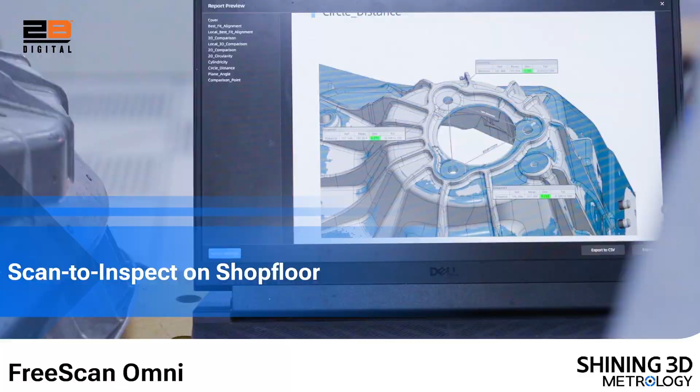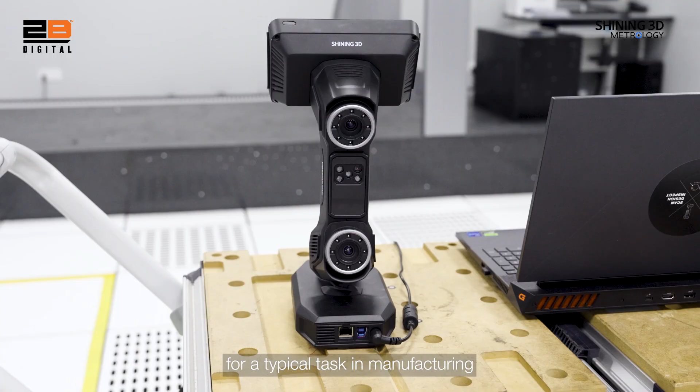In this video, I'll introduce you to our new standalone inspection-ready metrology 3D scanner, FreeScan OMNI. Today, we're taking it to the metrology lab for a typical task in manufacturing: first article inspection, or FAI for short.

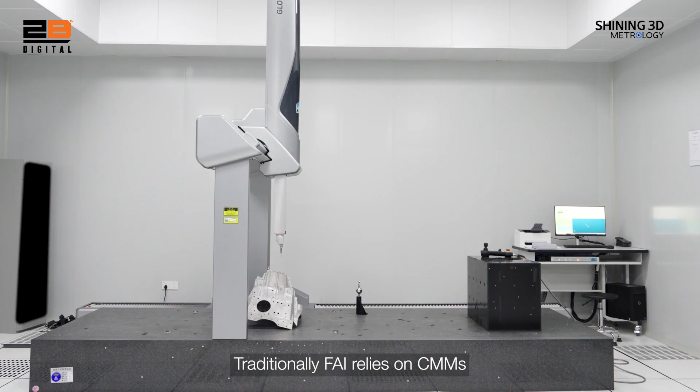It's a key quality control process used to verify that a newly manufactured part meets all required parameters before mass production begins. Traditionally, FAI relies on CMMs, which are accurate but slower and often require multiple setups and additional software to complete the process. This is where FreeScan OMNI comes in.

Its stream scanning mode combines wireless scanning at 0.02 mm accuracy with a PTB-certified inspection module. Data streams directly from the touchscreen controller to the workstation, where it's quickly processed and inspected. Compared to traditional methods, the entire process is faster, more flexible, and more efficient.

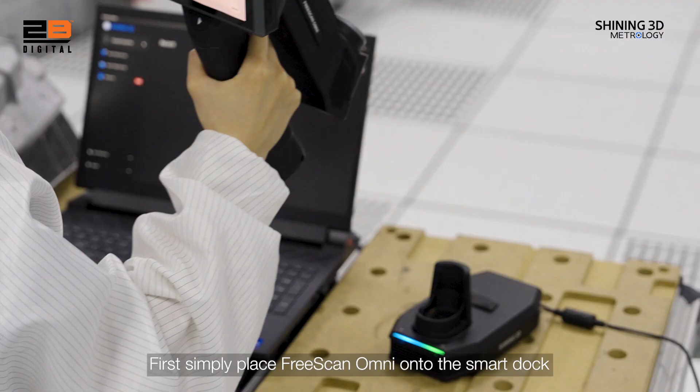This all-in-one system brings flexibility and performance together in a closed-loop FAI workflow. Let's see how it works, starting with this damping strut. First, simply place FreeScan OMNI onto the smart dock.

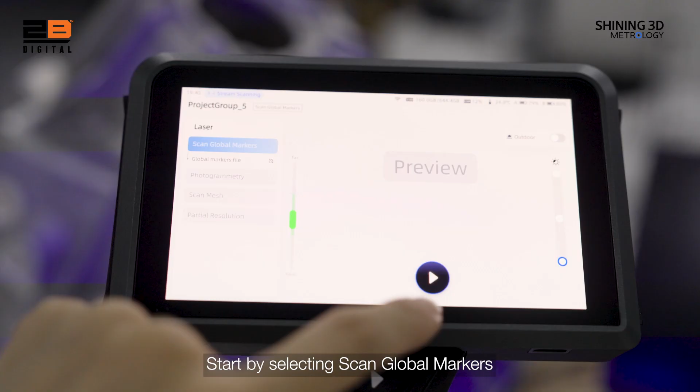The dock not only charges the device, but also bridges a Wi-Fi connection to the workstation, streaming scanning to the computer screen instantly. At this point, OMNI functions as a wireless controller for scanning. Start by selecting Scan Global Markers to capture markers on the strut. This step helps improve smooth tracking and more accurate results.

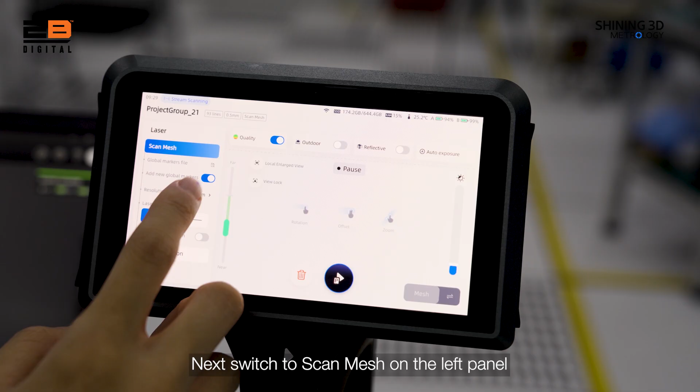Then click Generate GMF to create a Global Markers file. Next, switch to Scan Mesh on the left panel and set the resolution. For this part, 0.5 mm works well. For the scanning mode, choose 93 laser lines mode, which captures the entire surface efficiently.

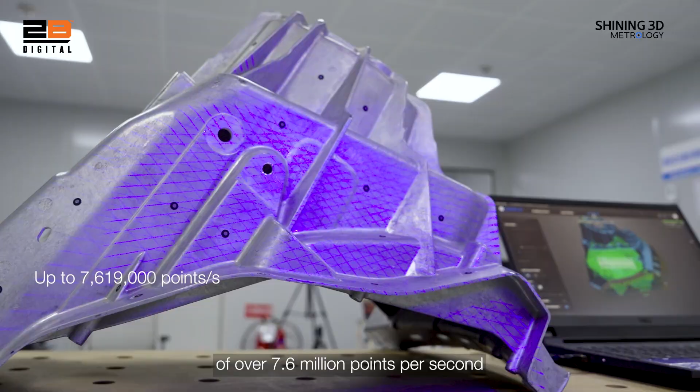Thanks to its triple 31-line laser setup, OMNI delivers an ultra-fast scanning speed of over 7.6 million points per second. For areas with fine details or deep holes, switch to 25 parallel lines or single line mode to capture more intricate features.

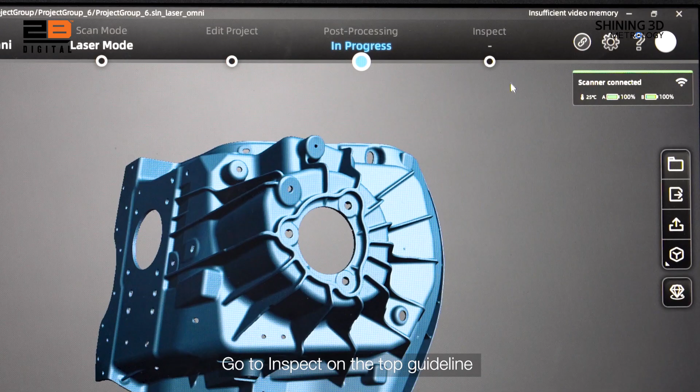Once the scanning is complete, review the data, optimize the mesh on the workstation, and save the final results locally. Go to Inspect on the top guideline to enter PTB-certified Shining 3D Inspect. Import the inspection template along with the mesh data we just saved. The system will automatically run a full inspection right away.

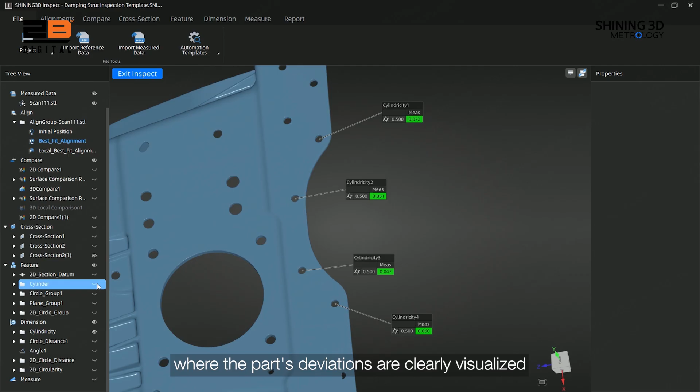Check 3D comparison and look at this color map, where the part's deviations are clearly visualized. We can also check cylindricity of these tiny cylinder features, perform 2D cross-section comparisons, and view detailed measurements like plane angles, hole diameters, and so on.

So that's a full FAI workflow for FreeScan OMNI. It combines fast scanning and instant inspection in one seamless process. A smart, flexible solution for first article inspection and more.